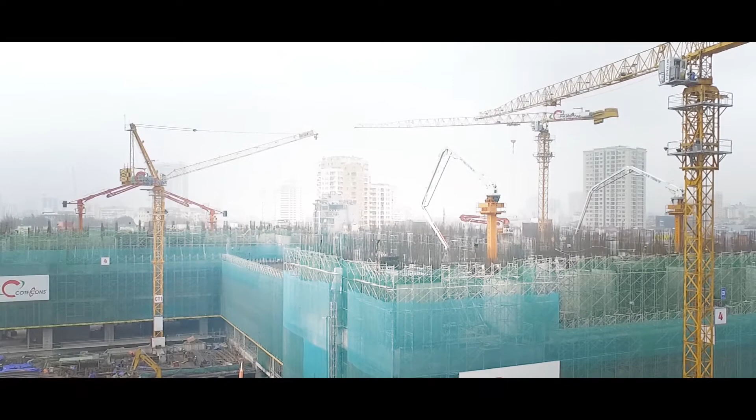Dawn is rising. The massive buildings are being hurriedly constructed. When the sun is shining, we will see the buildings reaching the blue sky like the strong rise of Vietnam. Being sustainable to last forever, Xuan Cement is accompanying with various great buildings of Vietnam today.

Aiming to produce cement of international standard quality for construction with reasonable price in Vietnam, Xuan Group has pioneered selecting new state-of-the-art technologies worldwide for the construction of modern cement plants in Vietnam.

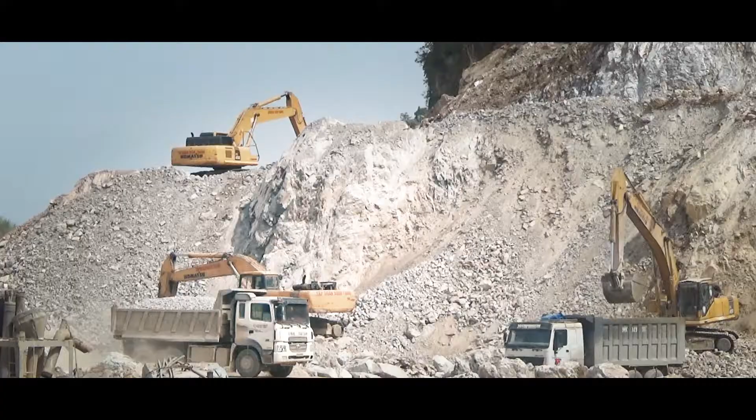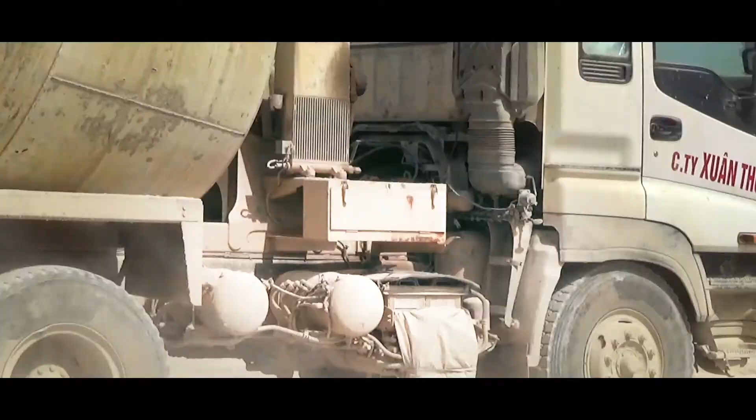One of the projects being built by Xuan is Xuan Cement Plant Phase 2, with the largest capacity worldwide of 12,500 tons of clinker per day and state-of-the-art technology and equipment. The plant is included in the Master Plan for Cement Industry Development of Vietnam for the period 2011 to 2020 and orientation towards 2030.

How have Xuan engineers constructed such a large cement plant with state-of-the-art technology?

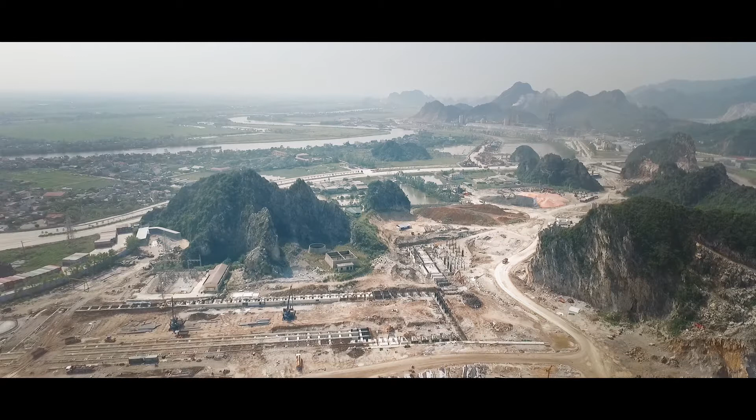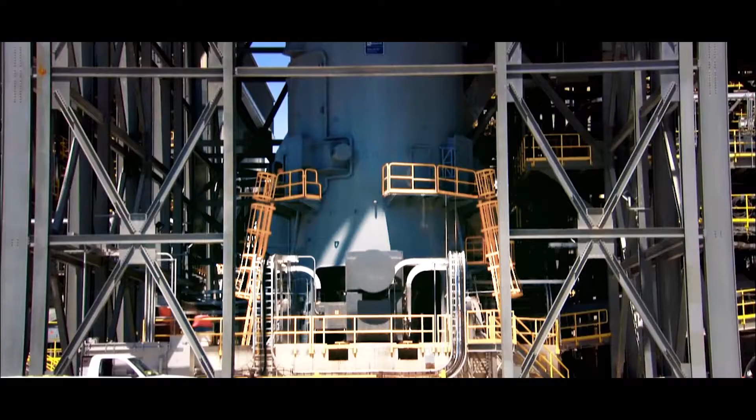After a period studying technology and selecting partners, Xuan Group delegated a team to survey the largest cement plants worldwide and study cement equipment suppliers. Through survey and evaluation, Xuan Group decided to invest in a cement production project with modern technology and the largest capacity worldwide, selecting FLSmidth as the partner.

FLSmidth is a leading global supplier of equipment and services for the cement industry and mineral sector, and it also completes the construction of such plants. FLSmidth has offices in more than 50 countries. The company has more than 130 years of experience and more than 15,000 employees around the world.

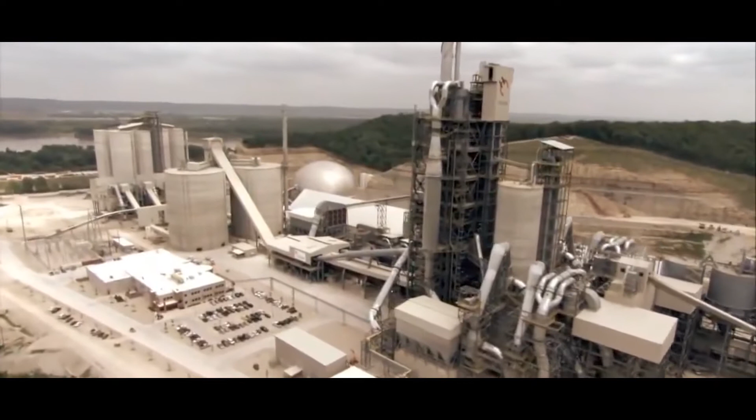FLSmidth built the Holcim Cement Plant in St. Genevieve, Missouri City, United States, with a capacity of 12,000 tons of clinker a day. It was the world's largest cement plant at that time.

On May 23, 2015, Xuan Group and FLSmidth signed a contract with a value of more than 10 trillion Vietnam dong to build a complete cement plant. Simultaneously, Xuan Group has signed contracts with 4 banks of Vietnam for this project construction.

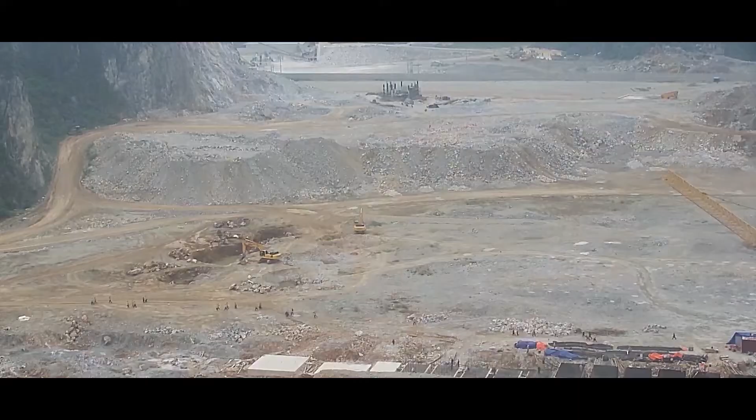Xuan Thanh Cement Plant Phase 2 is 60 kilometers further away from Hanoi. This will be the world's largest cement plant to be constructed in Vietnam. The production line will include energy-saving equipment, an emission control system, and the most advanced control system.

FLSmidth is very pleased to participate in the construction of this, one of the biggest plants in the world, with Xuan.

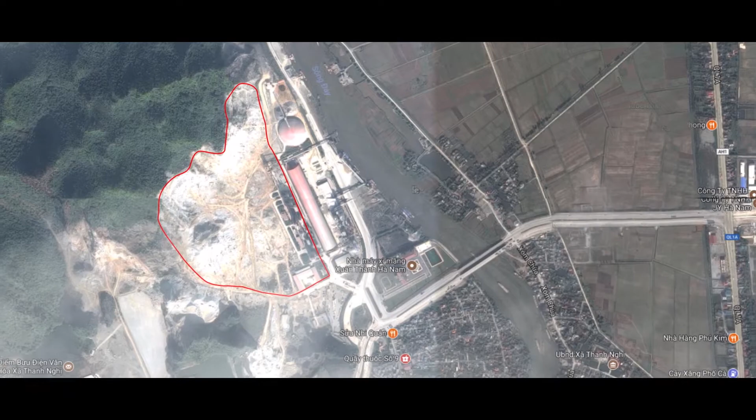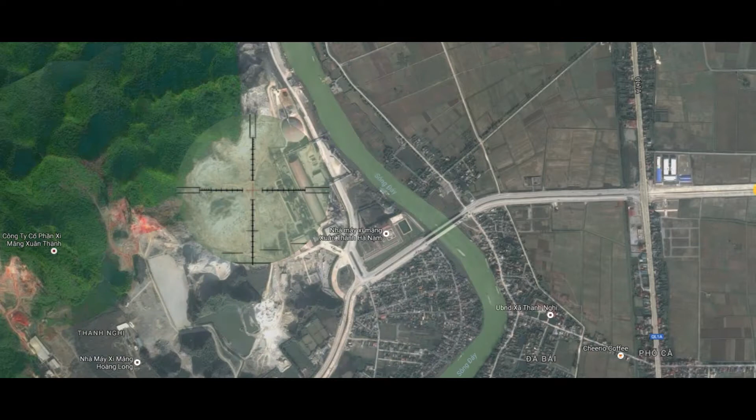Xuan Cement Project Phase 2 is of an ideal location. Here, there is an existing cement production line of Xuan producing cement with daily consumption of 8,000 to 9,000 tons for the market. Next to this plant group is Day River, with 240 kilometers in length, flowing through many provinces to Tonkin Gulf and Kim Son, Ninh Binh.

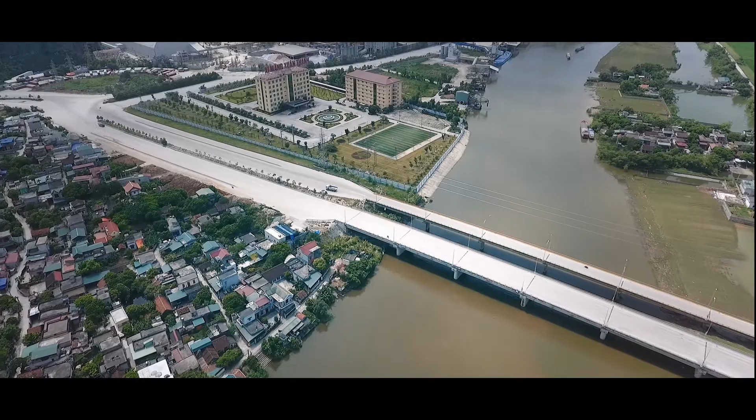The downstream of the river flowing through Ha Nam is considered the national river route. Here, Xuan has invested in a jetty complex to intake raw materials as well as dispatch output products when the plant is in operation.

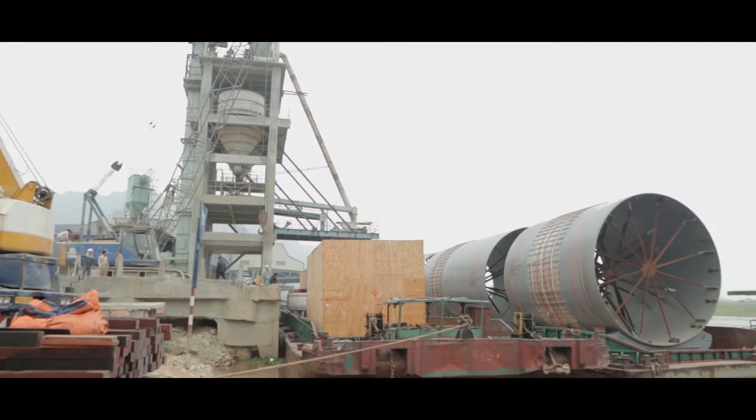Equipment assembled in other workshops and ordered overseas has been transported to deep ports of Vietnam by large vessels and then to the jetty of Xuan Cement Plant by large barges along Day River.

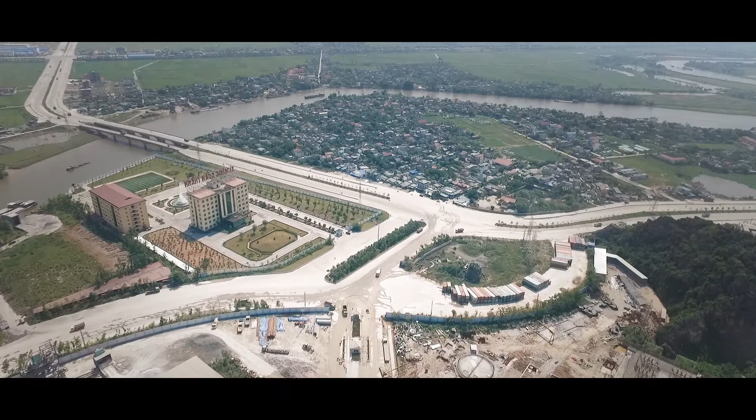A 2-lane wide road and a bridge crossing Day River were built to connect the highway and National Highway 1A of Vietnam, creating a very convenient road route for the plant to achieve economic efficiency in transporting equipment for construction, materials and finished products in the future.

Materials for cement production is the most important part of constructing a cement plant because it is directly related to quality and the price of products.

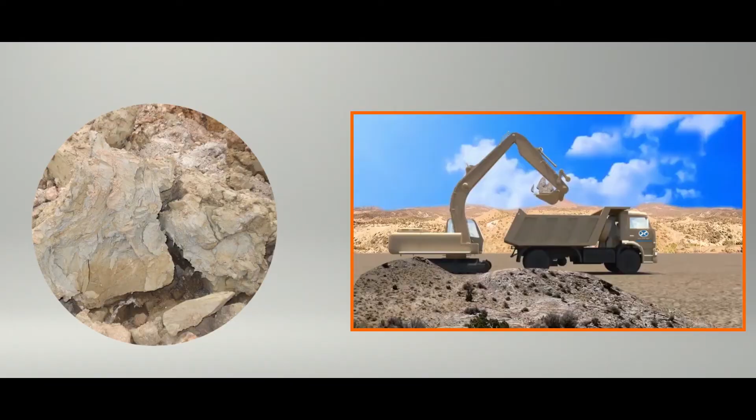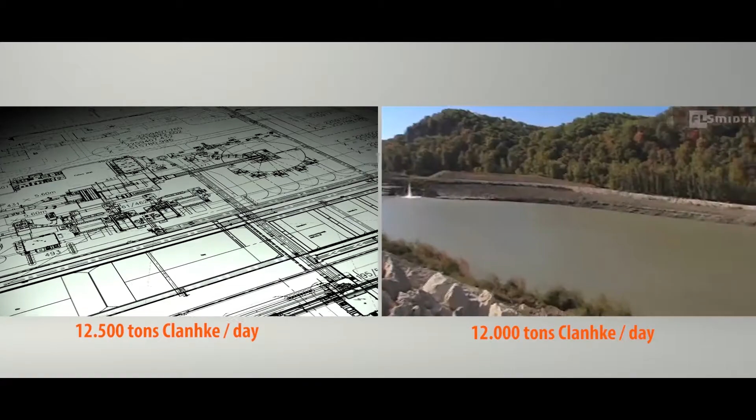This is the world's largest cement plant project, with a capacity larger than the plant built by FLSmidth previously in the United States. Highly qualified project managers of FLSmidth have joined the project from a very early stage, working continuously and closely with Xuan engineers with detailed plans from the beginning of implementation of the project.

The request from Xuan Group is that FLSmidth shall supply the latest technology, along with innovative and appropriate solutions, to ensure safety of the surrounding environment during construction and operation of the plant. After dozens of site surveys and calculating constructions and appropriate technology for safety of the environment, FLSmidth and Xuan agreed on the most optimal construction plan, as well as contingency plans with criteria for continuous evaluation during construction.

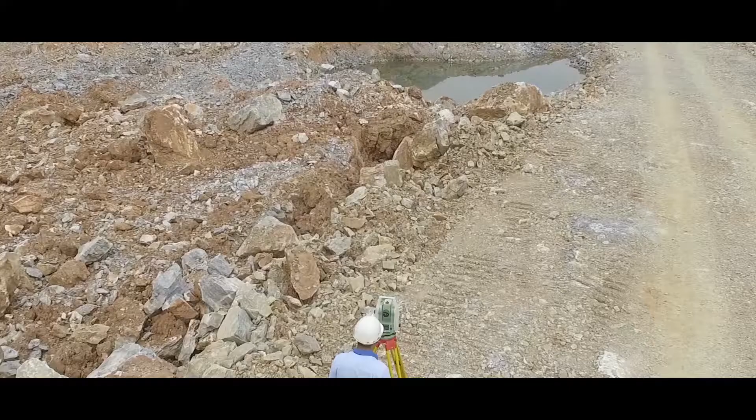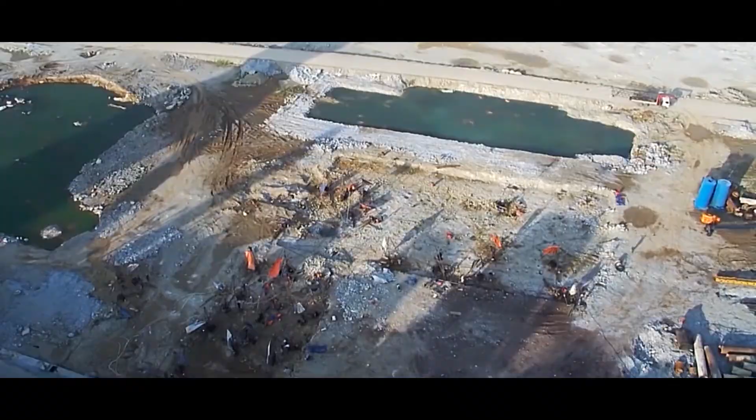Measuring and survey are an important part of construction, especially for a construction with various large equipment and civil systems with complex structure. Total length of probe drilling of all phases from pre-feasibility and strict investigation to detailed drilling is over 60,000 meters with more than 4,000 geophysical measurement points with minimum depth of 40 meters.

Surveying work has been implemented continuously since the investigation stage and during construction. Surveying parameters have been updated and processed on computer and updated to technical drawings implemented by one team of Xuan engineers to ensure the correct geometry and design positions of building items.

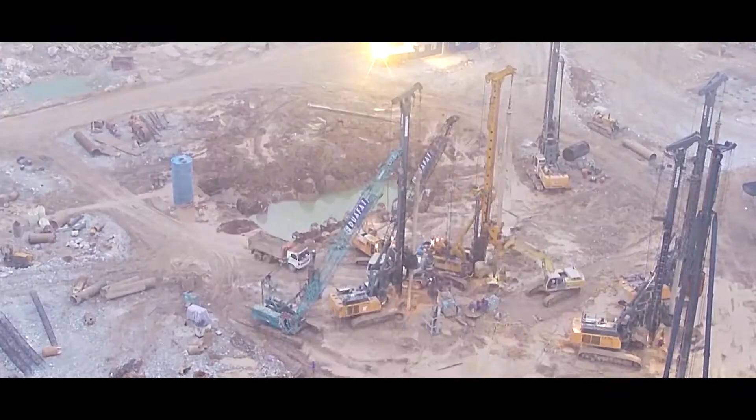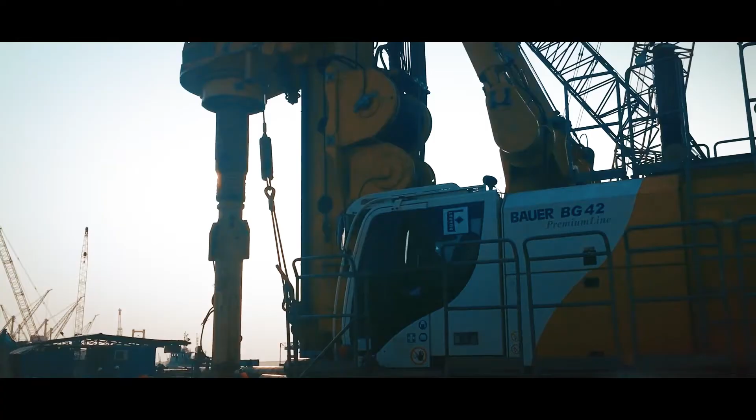Based on geophysical measurement data, the engineers calculated the executed bored piles under construction conditions of solid rock and karst cave. Bored piles are reinforced and sprayed with concrete by new technology. The construction has taken place in daytime and nighttime.

This created 1,474 bored piles with the largest diameter of up to 1,200 millimeters. The bored pile system has been calculated to create a solid and stable foundation for the construction system and overweight items to be installed.

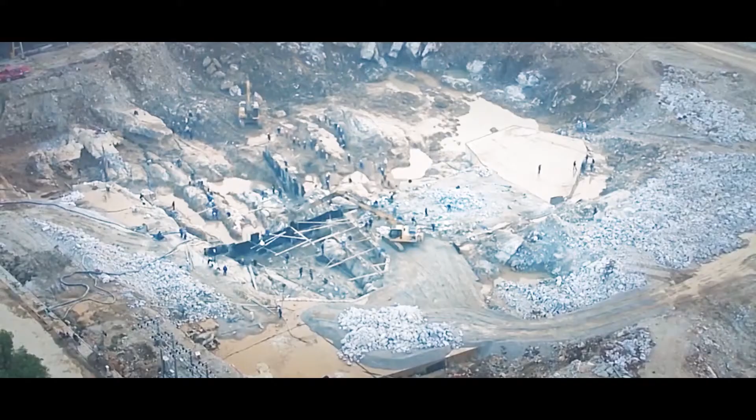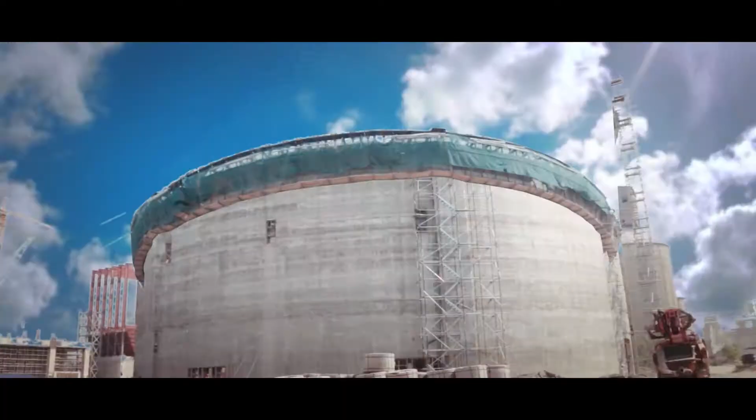All silos of the project were built using sliding formwork concrete technology. This technology created integrity of structure and no casting joints. It helped accelerate construction progress and finish fresh concrete surface with high quality.

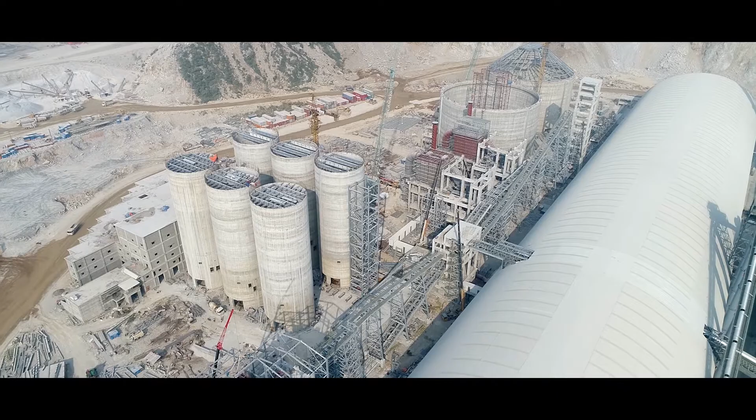Silos of the plant were completed earlier than scheduled, thanks to advanced technology and continuously and timely provided concrete from our neighbours' plants. To ensure the best quality of clinker for producing cement and exporting to international market, the plant

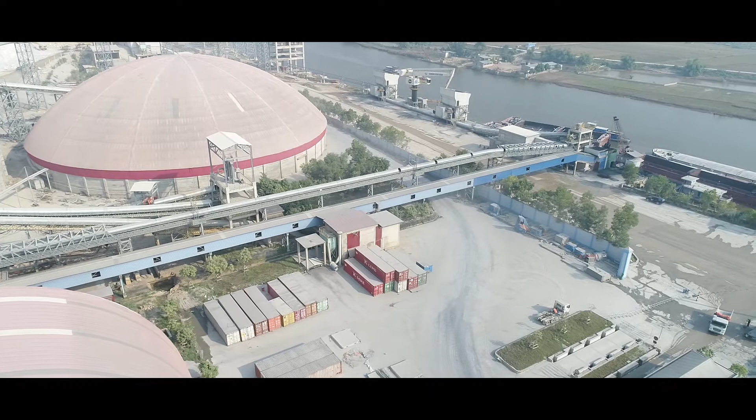has invested in constructing 3 clinker silos with capacity of over 300,000 tons. Clinker and cement are exported to the plant's port by automatic conveyor system with capacity of 1,000 tons per hour.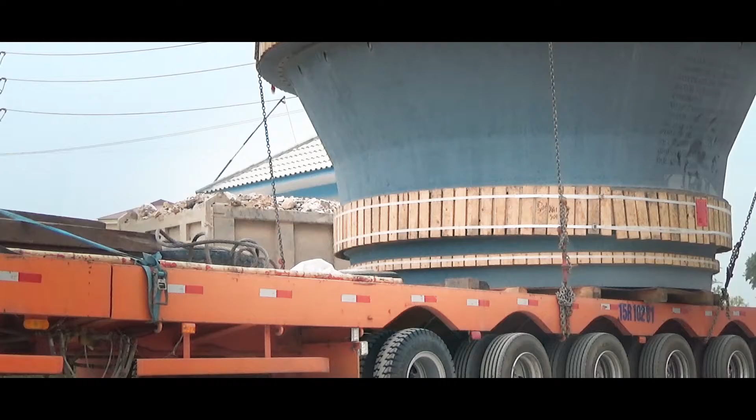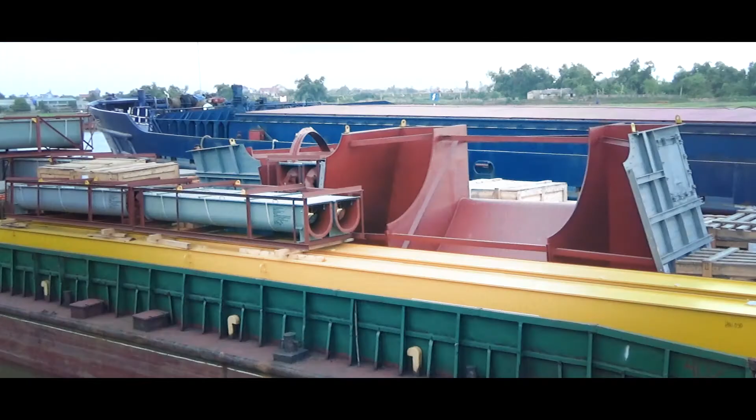The project has many oversized and overweight equipment, so transportation by road has only partially satisfied the demand for transportation of equipment with size and weight in accordance with road standards of Vietnam. Therefore, transportation by sea has been used at maximum level to transport this equipment.

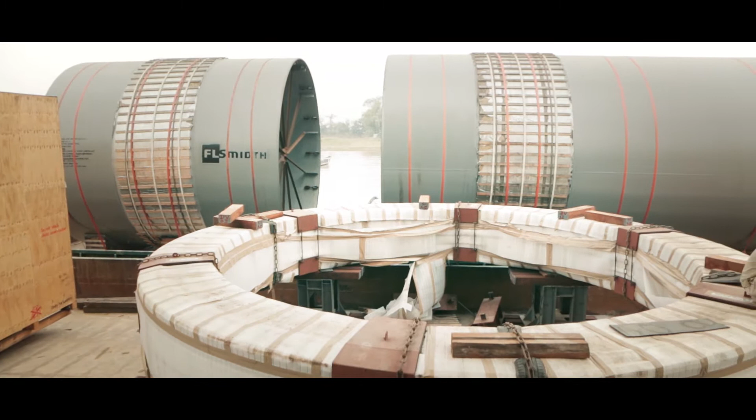The use of the river jetty requires calculation of tide for unloading equipment from ships in the port. Xuan engineers have been always ready, regardless of day or night, to choose the right time for unloading oversized and overweight equipment and transport them to the construction site.

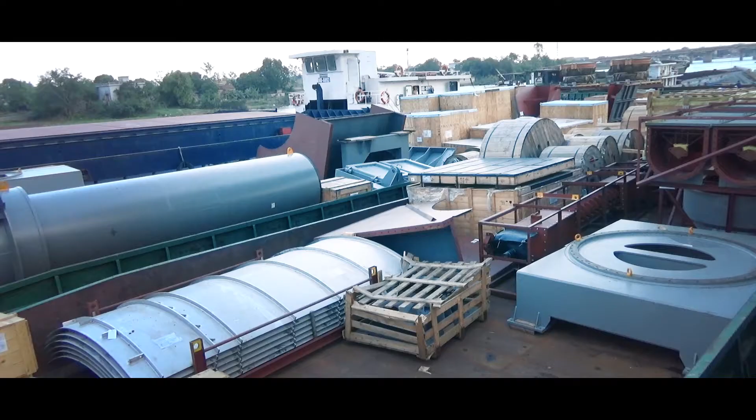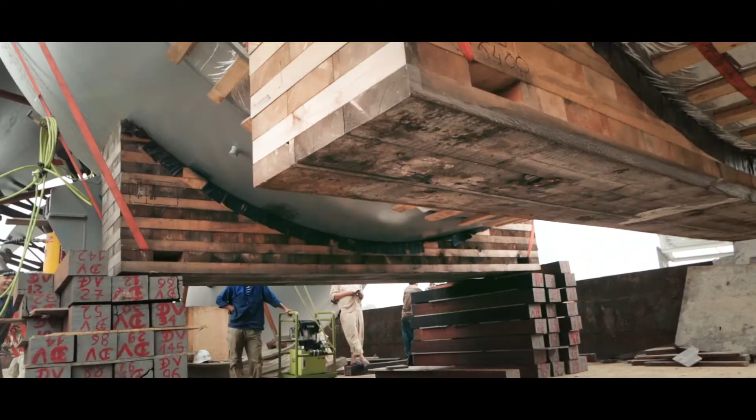Sometimes it is not possible to use crane unloading equipment from barge onto trucks to transport to warehouse or pre-assembly sites because of limited space of the jetty. Therefore, each barge arrival would be a meticulous work taking many days and nights.

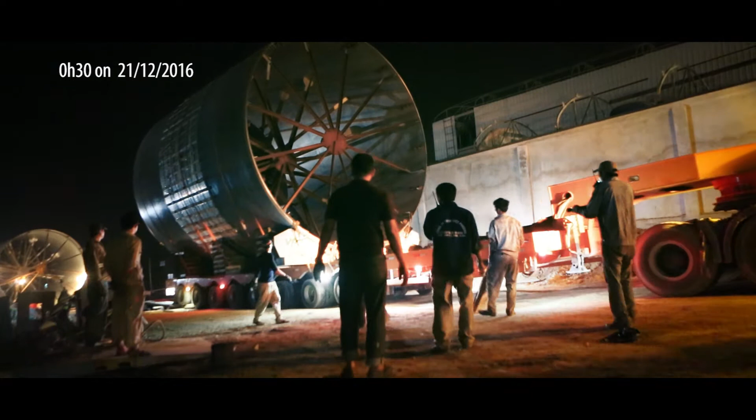A steel bridge was transited from the riverbank to the barge at the right tide, allowing a specialized vehicle to go onto the barge. Hydraulic jacks with hundreds of tons capacity were arranged together scientifically to lift equipment onto the vehicle. Moving by every millimeter, the vehicle would bring over 200 tons of equipment up to the riverbank and then to the warehouse.

FLSmidth specialists have always been available on site to give assistance and guidance during installation. Xuan site team have been responsible for planning as well as monitoring quality of site work conducted by dozens of different contractors. In order to avoid unexpected events during installation

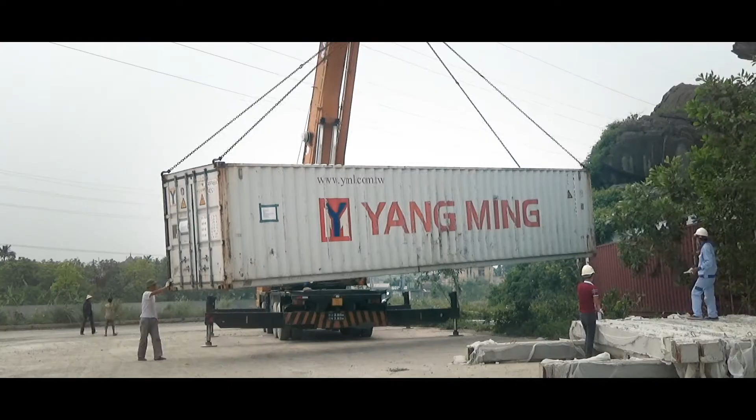at the construction site due to failure in supplying any details, FLSmidth and Xuan together carefully inspected goods after receipt and prepared all facilities and manpower several months before installation. Time schedules and updated erection sequences made by installation contractors have been submitted to Xuan.

Besides, FLSmidth and Xuan actively conducted inspection before erection. This helped save time by avoiding any last-minute unexpected events by resolving all problems before installation.

The most important factor in construction activities is high concentration on safety issues. Xuan and FLSmidth have had good preparation to ensure safety for people and equipment.

As you can see here, we are building a big factory and we have to deal with big equipment, so safety is our first priority.

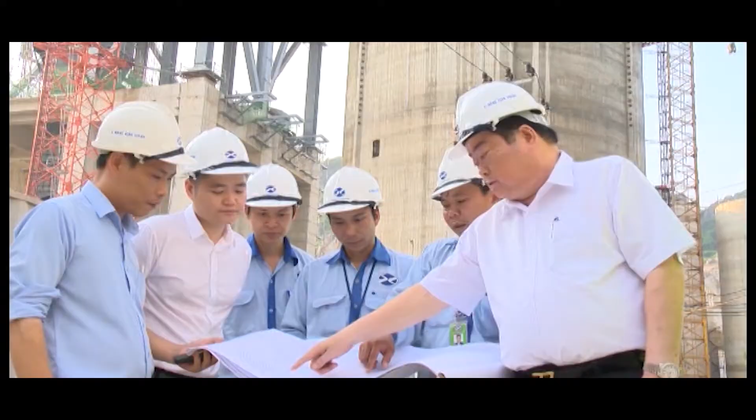Senior leaders of Xuan Group have always been present at the construction site to grasp and follow up all construction stages, especially in important periods.

The board chairman of the group had been present at night to encourage all officers, engineers and workers working at the site. It was a powerful source of motivation for work to be performed accurately, effectively, with excitement and enthusiasm.

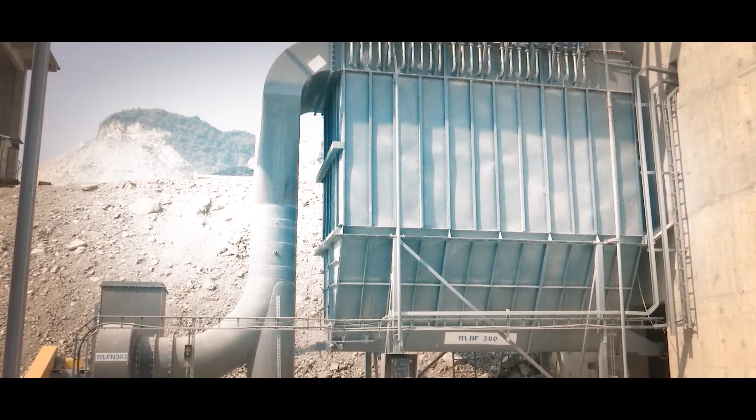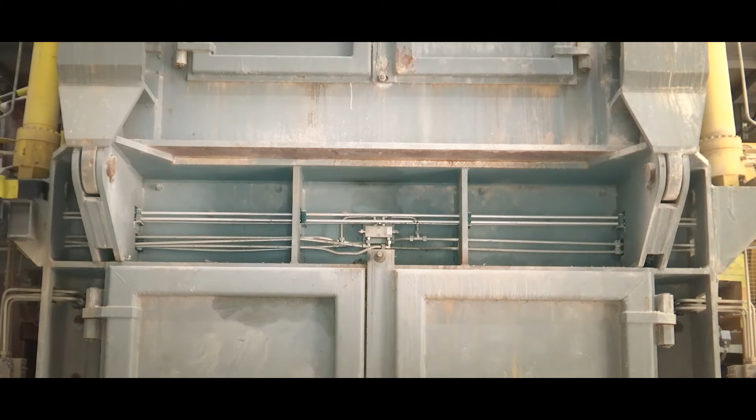System of limestone crushing plant, argillaceous rock crushing plant and additive are constructed and installed according to the most advanced technology of FLS with the complete capacity of 3,200 tons per hour. From this crushing plant system, material will be collected and sent to storage by automatic conveyor system.

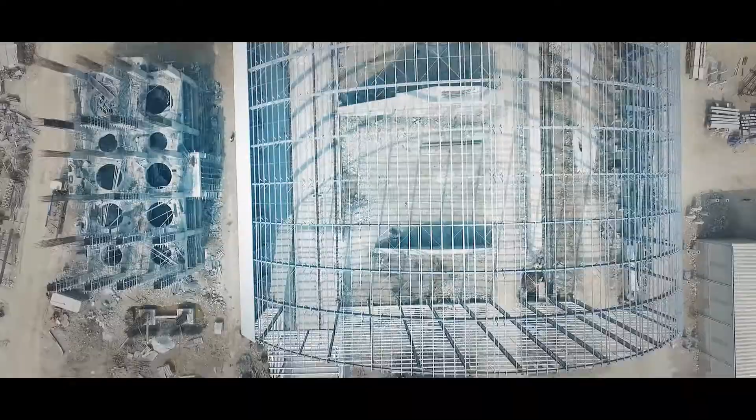Storages of raw materials with the area of nearly 50,000 square meters. The United States standard was applied for design and they were constructed with prefabricated steel frames and perpendicular structures. The construction of storages with pre-engineered steel frames was of high accuracy, uniformity and stability.

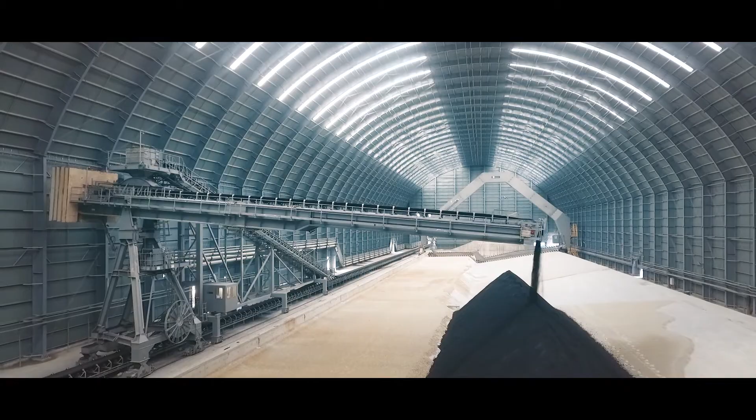The feeding system, hydraulics, and travelling system of the reclaimer inside storage are modern equipment with the latest technologies designed for large capacity, satisfying the plant capacity.

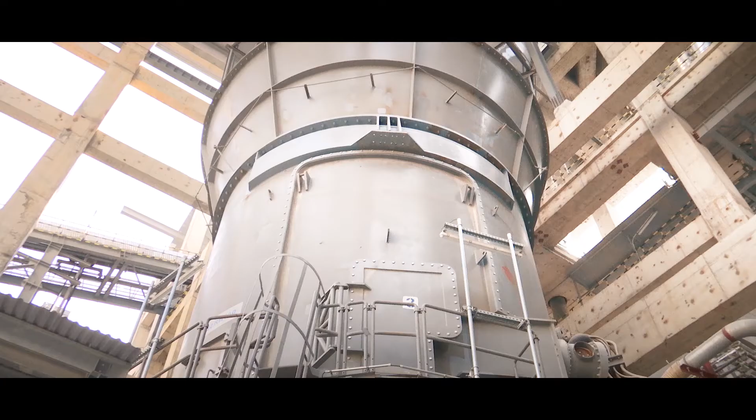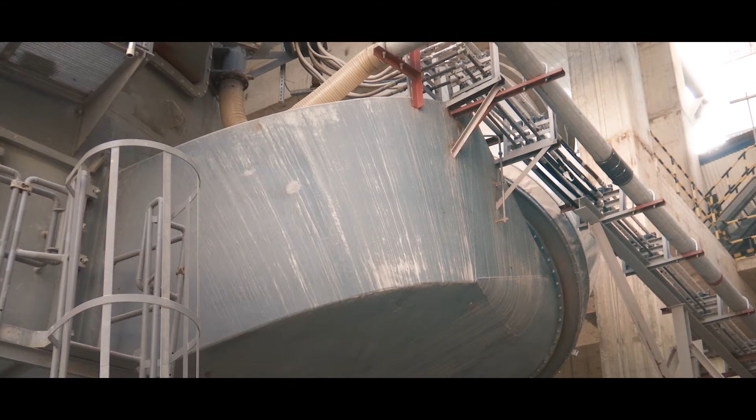Two material grinding machines, ATOX 50, with a capacity of 1,000 tons per hour, have been installed to ensure providing adequate material for the heating furnace system with a capacity of 12,500 tons of clinker per day, which could meet up to 15,000 tons of clinker per day. Smooth material powder will be transported through an air slide system into a silo containing material powder.

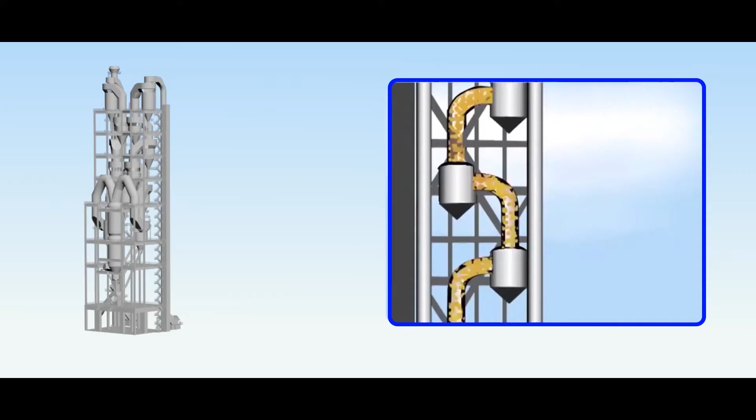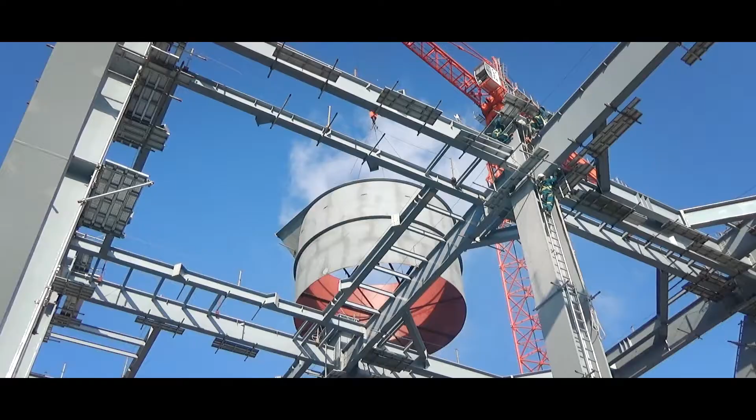The plant has a 4-string, 5-stage preheater, ILC calciner with 3-pier kiln and MMC cooler. The preheater was made of steel structure and consisted of large components manufactured abroad and transported to the construction site, as mentioned at the beginning of the film. Huge cranes were mobilized for installation of the preheater under strict supervision by FLSmidth engineers and the Xuan Thanh supervisor team.

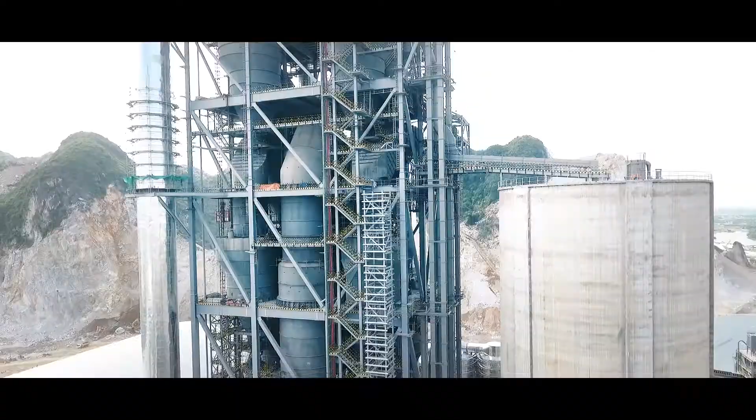This is the preheater with the most modern technology worldwide, designed by FLSmidth. The preheater has high efficiency, stable operation, and is energy saving.

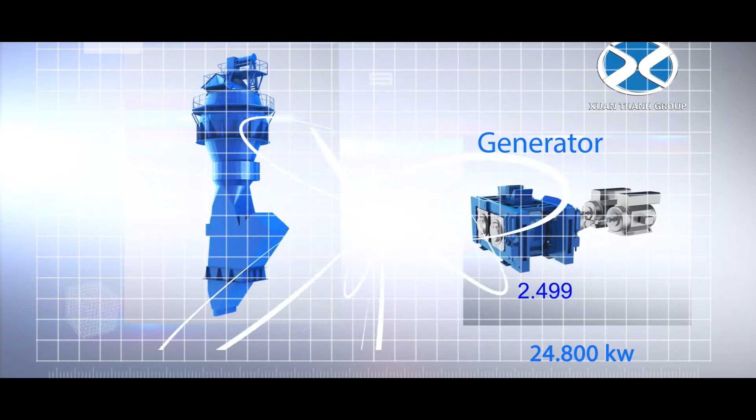Heat from the preheater and kiln shall be recovered for the purpose of generating power of 24,800 kilowatts. This will be conducted by Anhui Conch Kawasaki Engineering Company Limited, which has signed a contract with Xuan Thanh. Waste heat recovery power used for production will save 30% of energy for the plant, reducing national grid load. It will contribute by reducing production input cost, reducing product price, and enhancing brand value, thanks to environmental production contribution by greenhouse gas emission reduction.

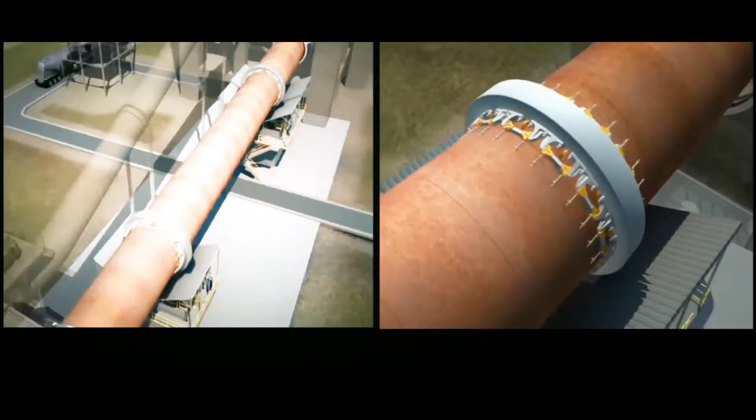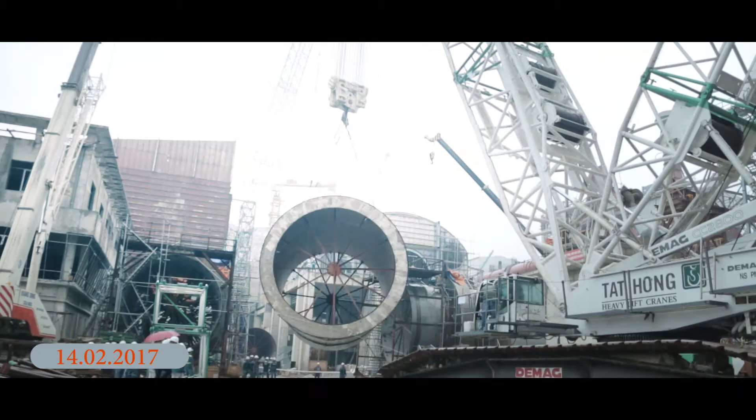The burning process taking place in the kiln always plays a specially important role in product formation. Xuan Thanh's clinker kiln has an inner diameter of 6.3 meters and a length of 97.7 meters, with a designed capacity of 12,500 tons of clinker per day, and a possible actual capacity of 15,000 tons of clinker per day.

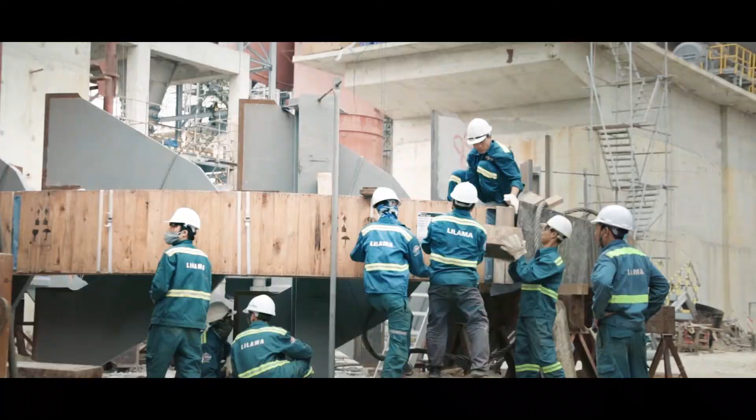The kiln has a weight of 1,900 tons, using FLSmidth's most advanced technology to effectively control emissions of NOx, SO2, CO, and volatile organic compounds.

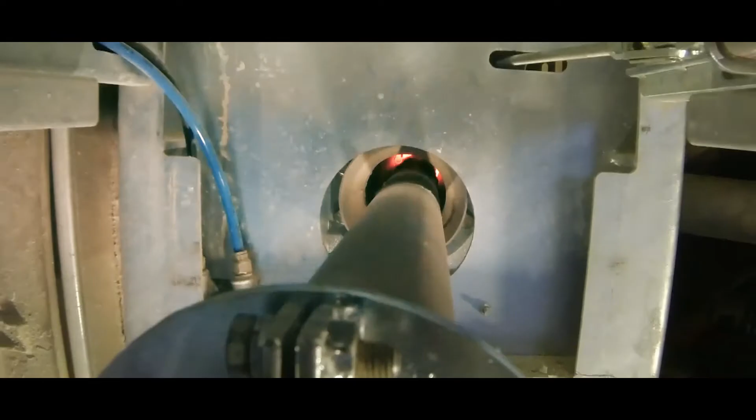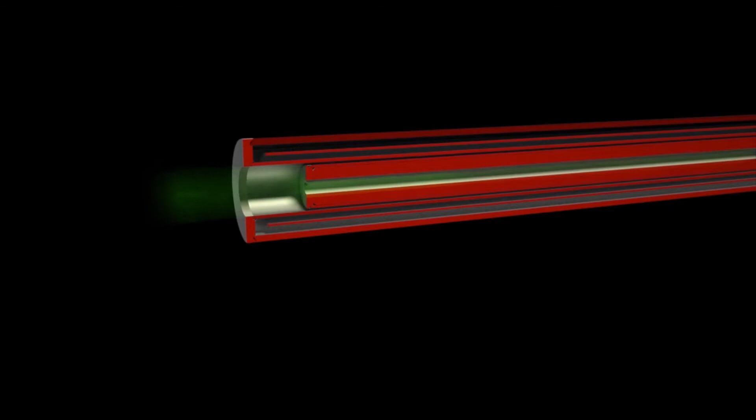The design for the kiln lock system of gas analyzer at the kiln inlet and calciner by FLSmidth is simple, reliable, and granted patent over the world. The kiln lock helps improve kiln efficiency and energy conservation. This design allows easy maintenance and cleaning of the probe.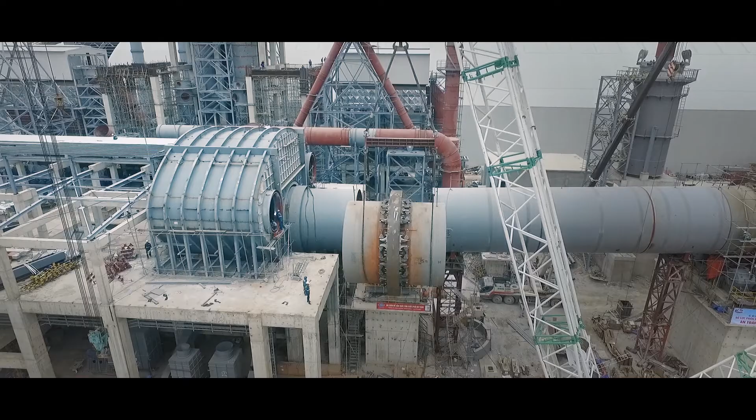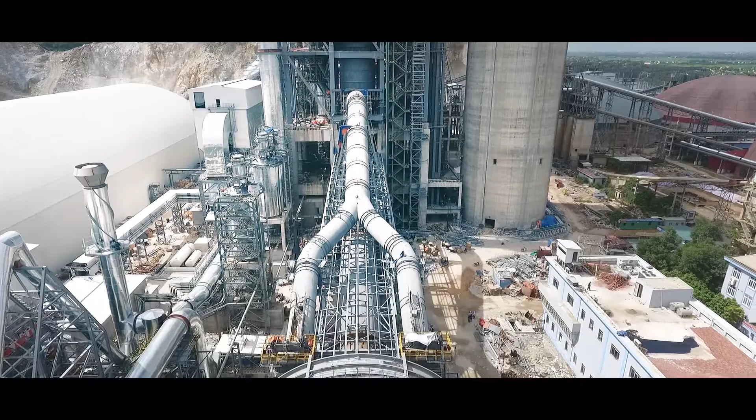Supporting rollers were integrated with the kiln shell. The biggest, at 320 tons, was installed at 24 meters height. To install such a roller, a crane with a lifting capacity of 600 tons was used. On April 5th, 2017, the last kiln block with a 250-ton kiln tire was installed in its place, completing mechanical installation for the clinker kiln section, ensuring safety, quality and efficiency, and ahead of schedule.

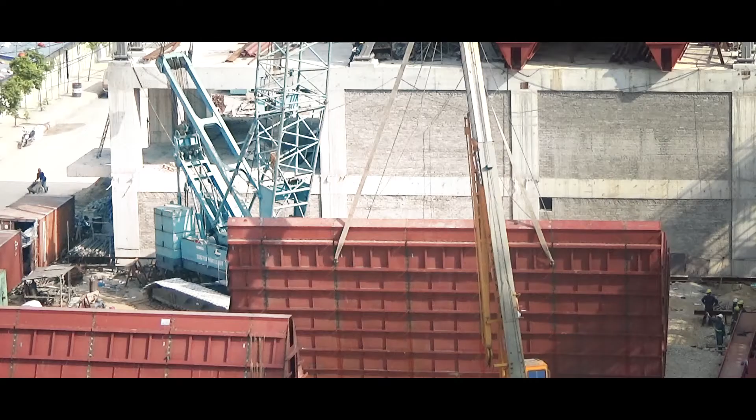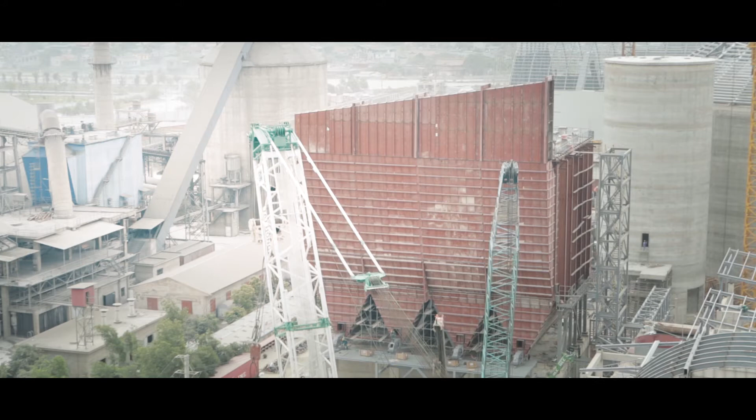Dust emission sources are available in almost every production section with different concentrations. Dust particle size is very small, less than 3 microns. Therefore, Xuan chose to use FLSmidth Airtech electrostatic precipitator technology as a safe option for the environment. Standard exhaust gas, after being filtered, is less than 3 milligrams per cubic meter of gas.

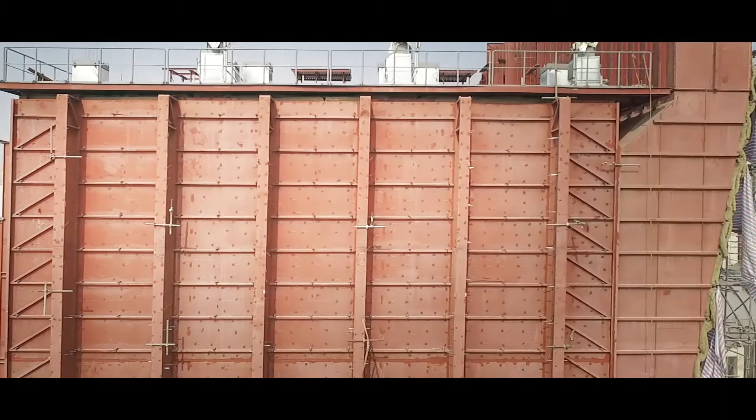This advanced electrostatic precipitator system is one of the most important items of the plant, implemented under the strict supervision of Xuan engineers. The big size filter is FLSmidth's new technology. Thus, it can be said that the Xuan Cement Line 2 project will be a standard project in terms of exhaust emission to the environment.

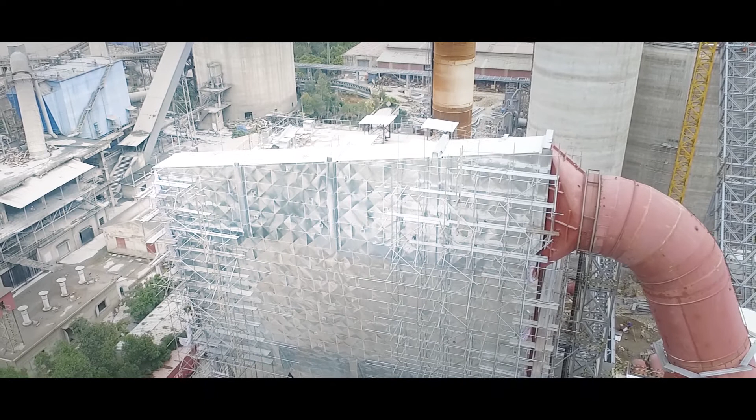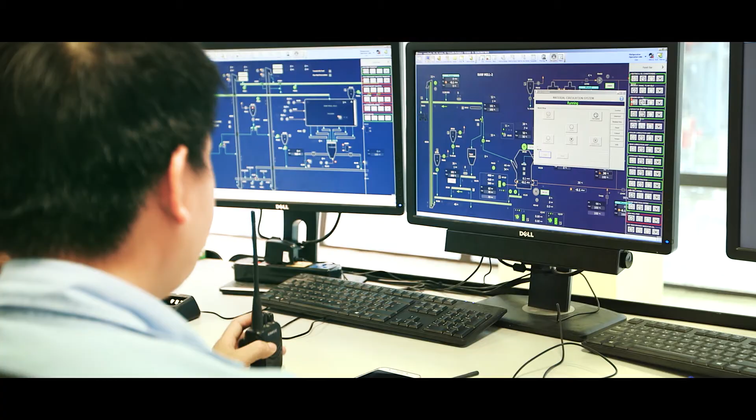The operating center of the plant is like the brain that determines the smooth and safe operation of the entire plant. The operation of all equipment in the production line is monitored and controlled in the central control room, which is completely automated. The whole system is connected through 20,000 meters of specialized optic cables.

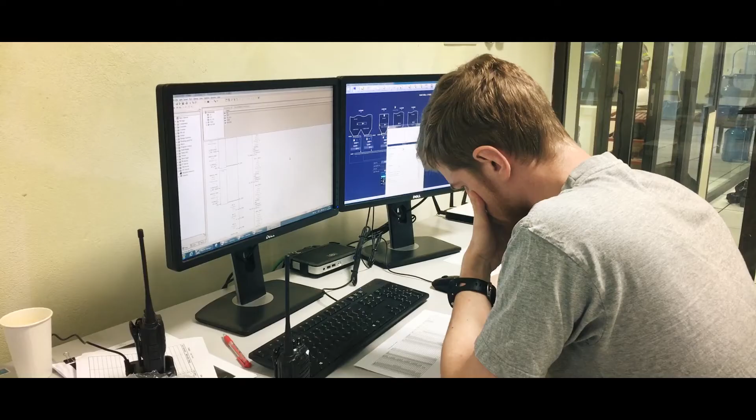A modern distributed control system, DCS, automatically controlling and monitoring the whole plant production process, has been supplied by Siemens of the Federal Republic of Germany. It is this DCS that enables operators to control the production process quickly and accurately, resulting in stable and high quality products.

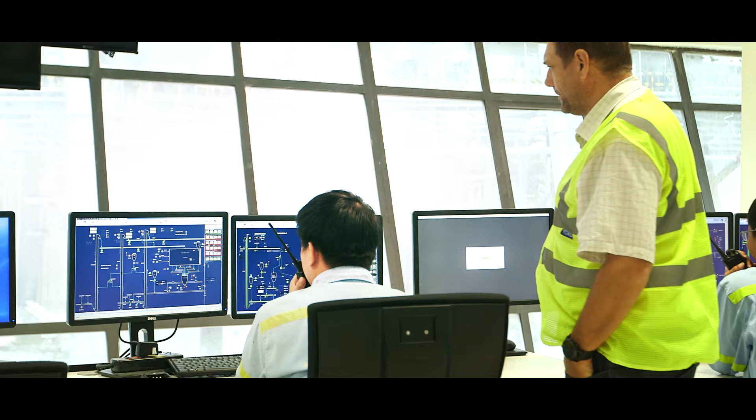The raw mix material system is controlled online from the product quality control room via X-ray system, the most advanced and newest one. In addition, the QCS system, connecting to dosing stations through DCS, helps enhance and stabilize product quality. Laboratory equipment of European standard, including an X-ray analyzer originated from Switzerland, analyzes input materials and monitors product quality quickly and accurately.

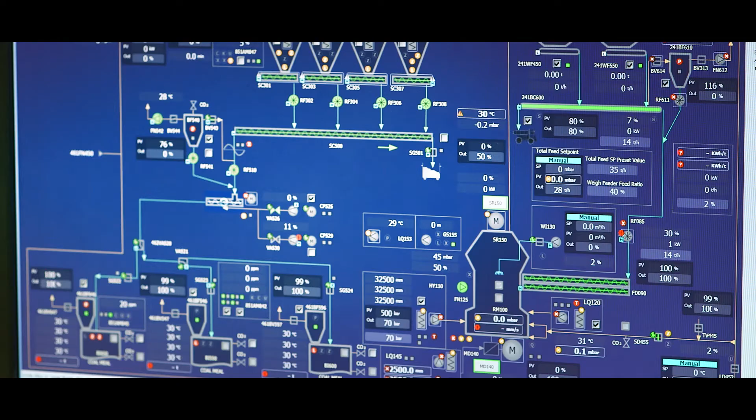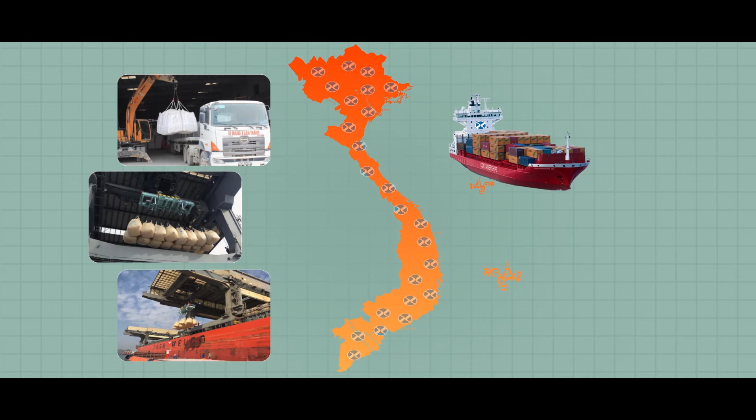By controlling finished products in each section, Xuan Thanh has brought the best quality products to customers. The completed plant has increased the capacity of Xuan Thanh Cement in Ha Nam to 5.5 million tons of cement per year, to be supplied for the nationwide market and exported to many countries worldwide.

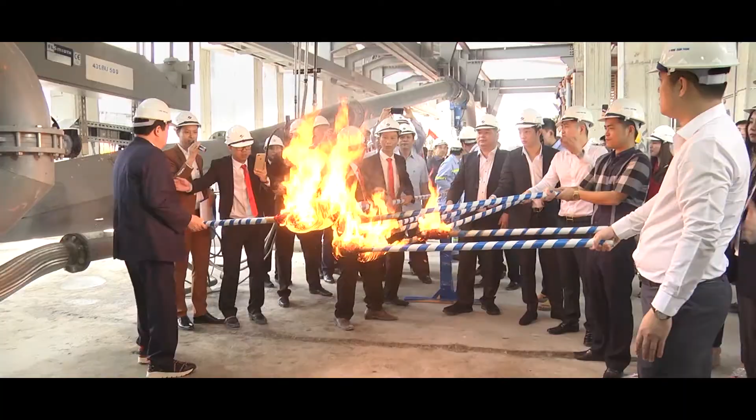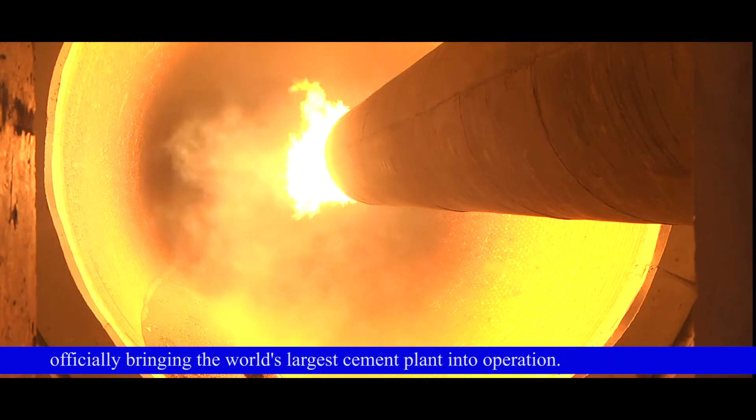At 9:10 on October 1st, 2017, the mutual kiln firing ceremony of the two cement plants of Xuan Thanh, Ha Nam, was started by the chairman and vice chairman of the kiln by pressing the startup button of the kiln and burning torches for the kiln firing, before the participation and presence of many senior leaders from central to local government, the top experts of FLSmidth, contractors and all employees.

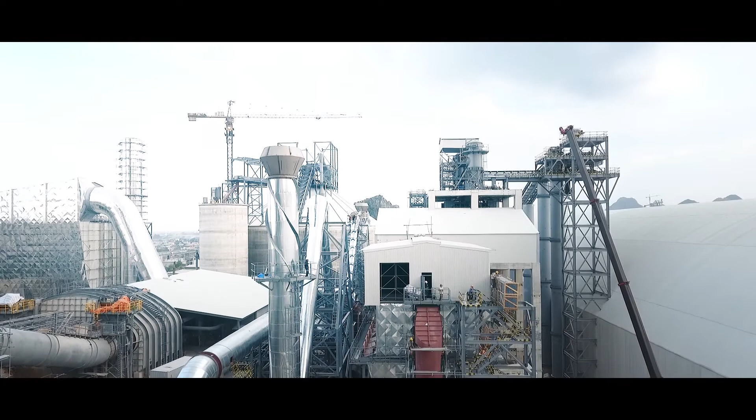A cement plant with the most modern schedule worldwide has been formed by teamwork of the engineers of Xuan Thanh and FLSmidth, demonstrating the strength of a leading group in Vietnam. It is not only the pride of all staff, engineers and workers of Xuan Thanh Group, but also the pride of Vietnamese people who are gradually constructing wonders for Vietnam today.